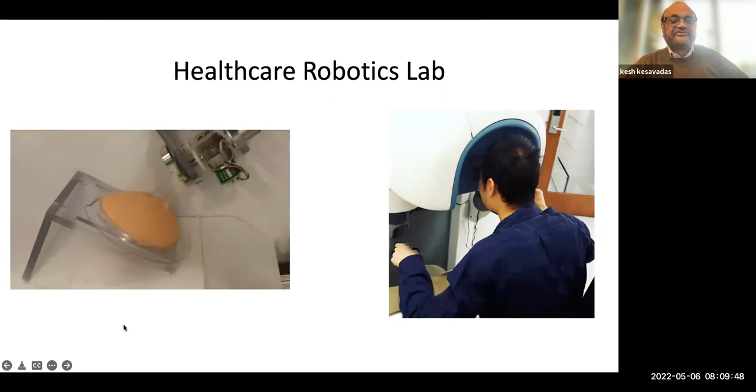So let me just start by giving a brief overview of my work. Here on the left-hand side is a robot we are working on to do breast biopsy. This robot is capable of automatically recognizing different types of tissue so that it will help for cancer.

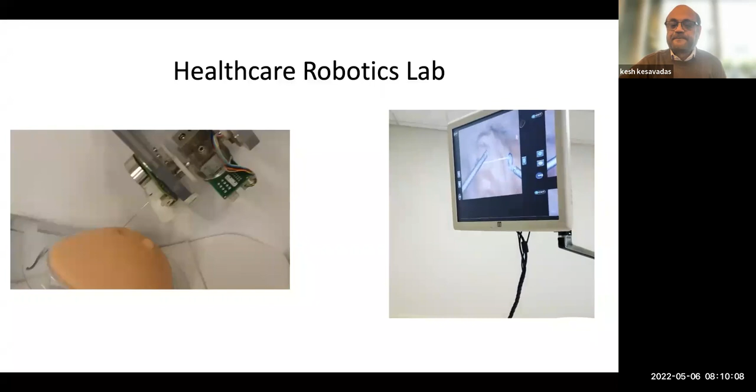The second is work that I've been involved in for more than 15 years, and that is training robotic surgeons for Da Vinci and other robotic systems. A system called ROSS was developed in my lab and commercialized, and is used in many hospitals and medical colleges around the world today.

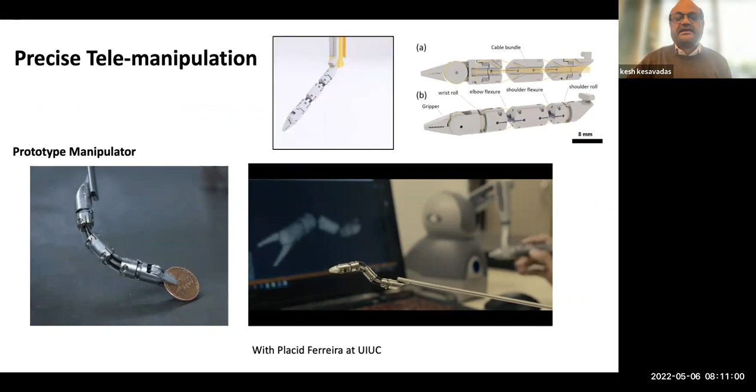So having said that, let me now also show some other work that we've been involved in. This is work I'm doing with Placid Ferreira at UIUC, creating a very small size robot for laparoscopic surgery. So today's topic is looking at human-machine interface in robotics.

I will break this into 4 parts. First, I will talk about the need for better human-robot interaction. Then I'll give you 2 examples of the work that we have developed. And then we go into a little bit about different techniques that we have used for identifying signals and some contributions that we have made into that space. And finally, a look at how robots can be used to understand human emotion.

So let's start about human-robot interaction and collaboration. Increasingly, robots are there everywhere, whether you go to a warehouse of a delivery center like Amazon, or you go into an operating room in a hospital. Robots are really everywhere. And with robots participating in the human environment, the question is, how can humans communicate better with the robots?

There are a number of reasons for this. One is, of course, safety. Traditionally in industrial settings, you have more control about the safety. You can put different kinds of tripping systems and so on and so forth. But once you have a robot actually working with you as part of your day-to-day environment, then safety becomes a bigger issue. The second is, how can you make robots understand your intention?

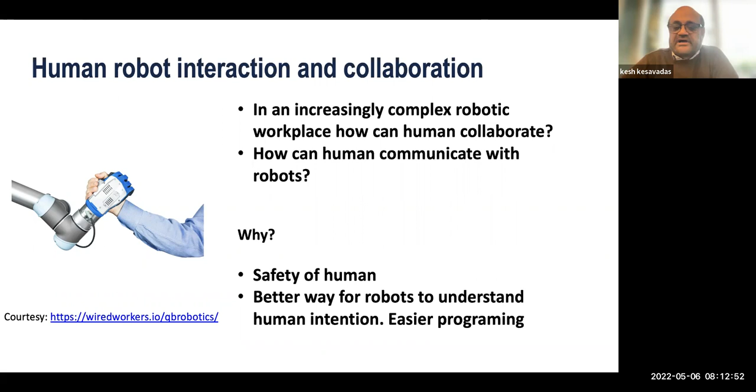I mean, if you have a human worker working with you, you always communicate verbally, non-verbally your intentions, and people understand what you're trying to do, right? When you have a robot doing that, how can you make that easier?

So my thought is that the next generation of industrial robots, it's not going to be systems that are completely pre-programmed. While it may also be true that in a very large manufacturing environment, you would still have robots with good feedback control systems and with good sensors and so on, doing really automated work.

But think of manufacturing domains where you want robots to be collaborating with humans in a somewhat unstructured environment. In these environments, we already see robotic systems helping people in the auto industry in lifting heavy objects and things like that. But in the same line, how can we make systems that are even more in tune with the human being and the thought process, which is what we are trying to get at.

So the question here is, can robots actually tap into your thinking process in your brain so that even without gestures or verbal interactions, can robots understand your thought process and react to it and complete some task you want to do? That was the original thought of our research.

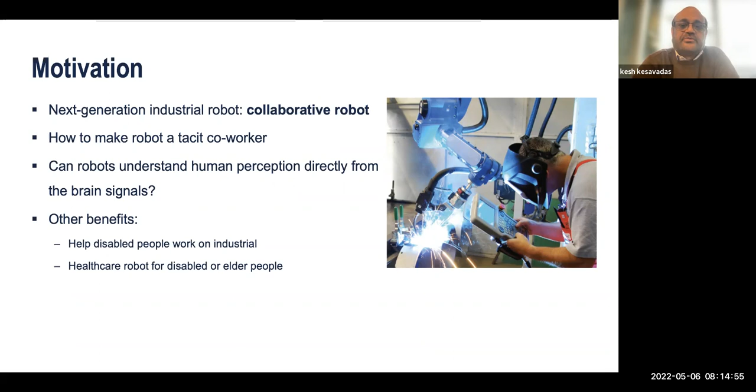There are many reasons why this might be helpful. One is that you could get industrial workers, also people from a wider background, including people with disabilities, to now participate in manufacturing. It could also help the elderly population through non-verbal cues and so on. So there are a lot of interesting things here in terms of learning from reading from the brain itself. It's been a big area of research, especially in the medical domain, for the last 20 to 25 years.

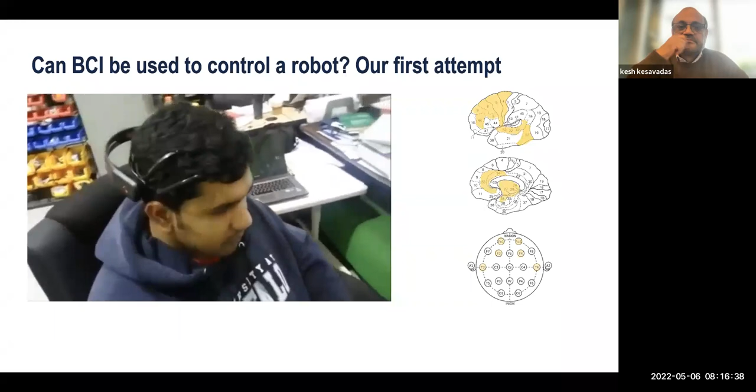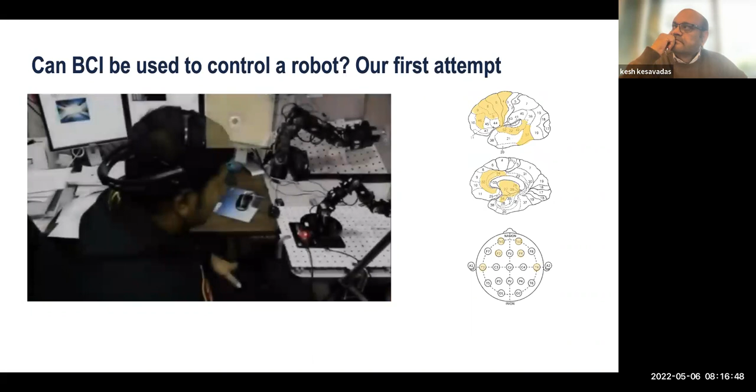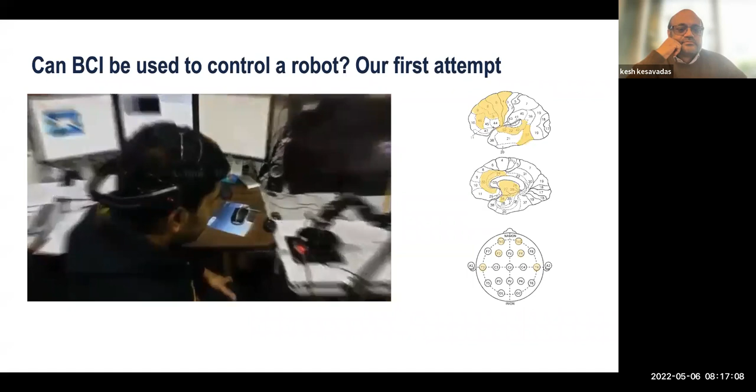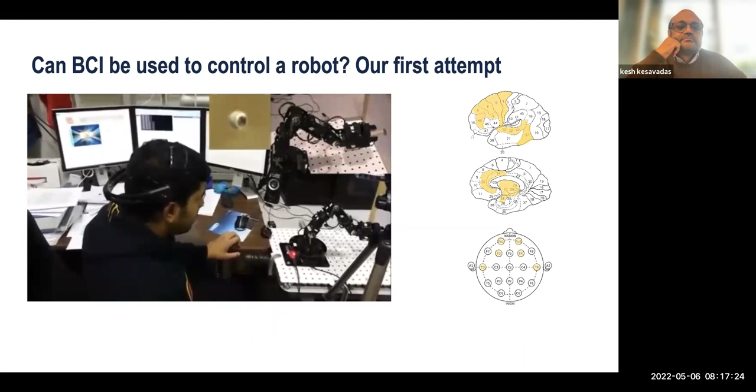Brain or mind-controlled robotic systems developed at the Virtual Reality Lab at University at Buffalo. A human operator is trained to control various actions of the robot by thought process. Complex trajectories are broken down into simple mental commands using a grammar system called ACTemes. The task being demonstrated here is to successfully insert a peg into a hole. First, the user is shown imagining a push action. Next, the user applies motion similar to rotation. Finally, by combining these two basic motions, the task is completed successfully. Most participants in our study were able to learn the grammar-based mental instructions in less than one hour.

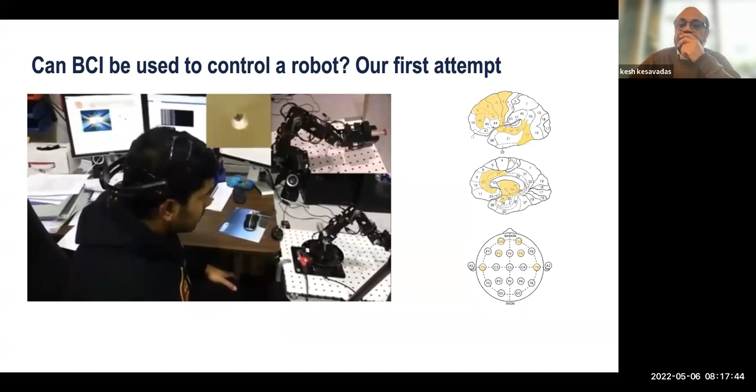One unique aspect of our study is that we were able to implement a mind-controlled robotic system using non-invasive EEG sensors. This work was actually our earliest work that I did when I was at University at Buffalo. This result was very encouraging, and it actually led us to getting a grant from the National Science Foundation to explore this idea and expand it further.

We looked at two industrial applications: one was welding, and the other was pick and place type work. Let's start with the welding robotic work that we envisioned, and we actually completed this project.

Here we used a concept called steady state visual evoked potential, or SSVEP. In a human brain, when you're given a visual stimuli, usually less than 10 hertz, it actually evokes a potential in the brain. For example, if you watch an LED light blinking at 6 hertz and keep staring at it, it sends a signal in the brain that can be captured using an external brain-computer interface. This was the idea we thought could be converted into an industrial application.

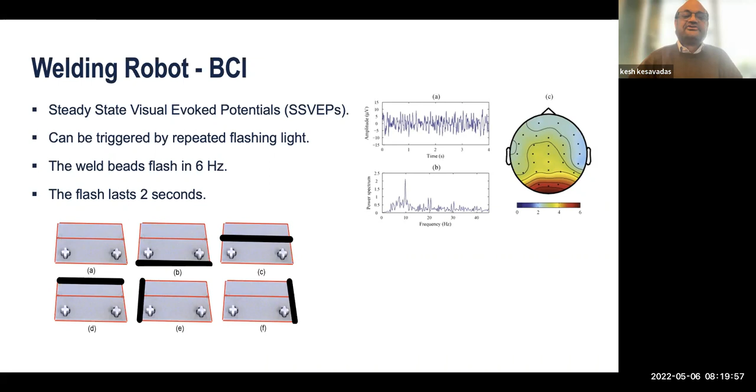If you look at the bottom left picture, you see two parts being welded. The horizontal line in the middle is where the welding is supposed to be done, but there are other edges as well, and any one of them could be a welding length. So what we're trying to do is put this welding setup in front of a visual system, like a camera, which automatically identifies all the edges that could be welded, and then it starts blinking at a frequency that can trigger an SSVEP. The human operator watches this, and the moment he or she identifies the welding length, it automatically sends a signal to the robot, and the robot comes, picks it up, and welds it.

Let's watch this experimental setup. On the right-hand side, we have a simulated robotic system that is used a lot for training purposes. We took a welding gun and connected it to a KUKA robot. Then, as it physically performs the action, the computer simulates the welding process, so we really don't need an actual welding system here. We took that and created this experimental setup, then tried to implement it to see if it actually works.

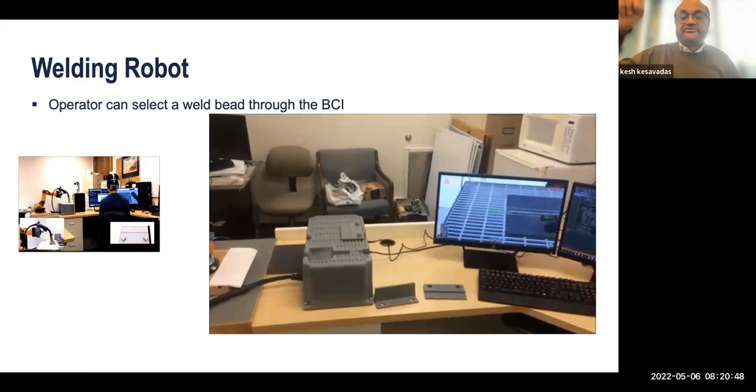You'll see in the left picture here, there's this welding system with the camera attached to it. The camera can go and look at the welding area and pick up all the edges that are potentially ready for welding. So let's look at this system working.

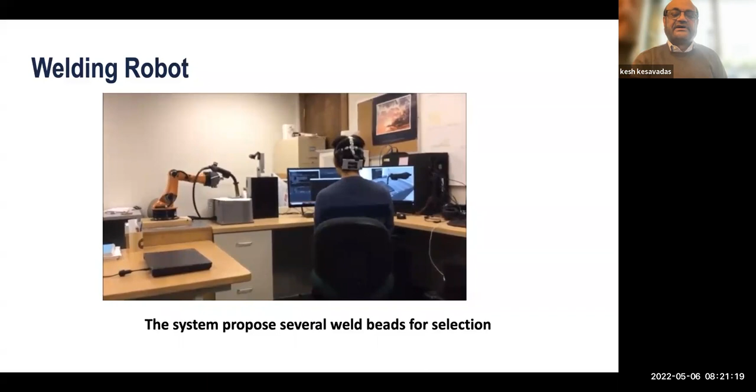Here the operator is wearing the HMD and is looking at the light blinking, and you will see that very shortly. The camera picks up the welding area and starts creating this SSVEP frequency signal onto that. As it blinks, the operator picks up the edge by staring at it for about 10 seconds.

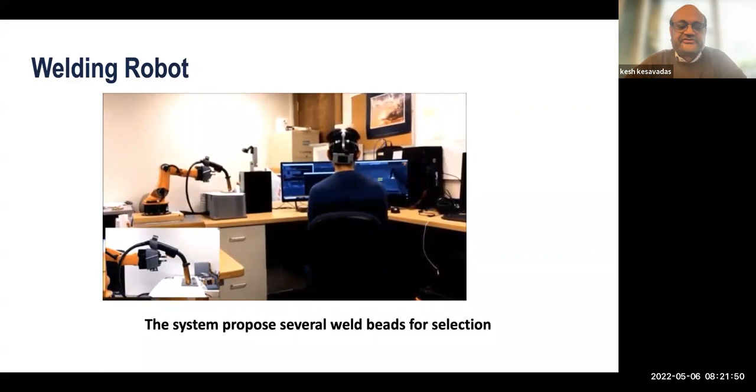You can see these edges now, it's automatically picking up different edges. So it picked up two. Now this is the one you want to weld, the middle one, right? So the operator actually looks at the middle one while not focusing on the other ones. This information is sent to the robot, and the robot now goes and starts actually moving and welding this operation. So this system we developed, and we did some human subject tests on that.

For signal capturing, we used a system called canonical correlation analysis, also known as CCA. It basically picks up all the data from about 18 different sensors, and using this data we can create a threshold. The threshold tells that if there is a peak above the threshold, then it sends a signal. If it's below, it is idle state, and if it's idle, it does not create any signal.

So initially we started with this approach called CCA. We tested that on 3 subjects. They were initially trained to use the SSVEP concept, and then they were provided with 5 different experiments where they were required to look and identify the welding edge, and then the robot had to do that.

We see that the 2 other subjects we are quite successful. They're able to complete 85 to 90% of the time correctly, with the robot able to weld the right edge simply by reading from the brain.

But in one of the subjects, the results were not good. There could be a number of reasons, everything from the leads not being attached properly on the head, to the subject not completely understanding the concept of looking at the welding and identifying the right edge.

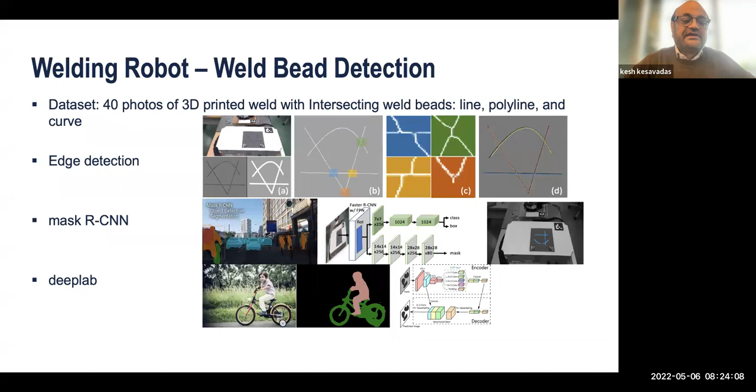In fact, we tried out many different ways, including standard edge detection techniques, using Mask R-CNN, DeepLab, and so forth. You see the figures at the bottom—these are automatically recognized data, and the one on the right gives us the best result, and that was based on the DeepLab approach.

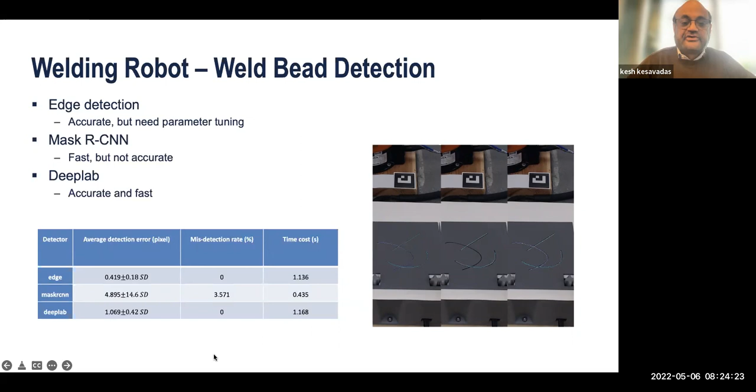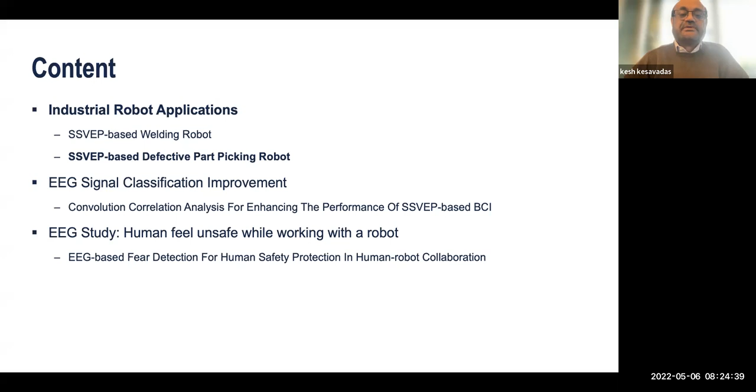So let me continue moving forward now with the focus of this paper, which was trying to see if we can now apply this to picking up a defective part from a robot. Let me explain the experiment to you first. The way this experiment works is...

The idea behind that is that there are a number of parts moving on a conveyor. There's a human operator constantly looking at these parts moving on the conveyor. Now, there are randomly a few parts which are defective. Once you find a defective part, that information the human recognizes is now communicated to the robot, and the robot goes and picks up that object alone.

To do this experiment, we set up a conveyor system, and we picked up these bolts as an example, and we created a few bolts which do not actually have a head in it—so those are defective parts. The human operator would drop parts on the conveyor. This is the second operator, and the part will start moving while the person wearing the head-mounted BCI keeps staring at the parts as they move on the conveyor.

So instead of directly staring at the conveyor, what we did was put two cameras, one in the front. As soon as the part appears, that is captured in the picture and put into one of the 4 images on the monitor. As you see, there are 4 images, so each image is a part, and each image is now flickering at a different frequency.

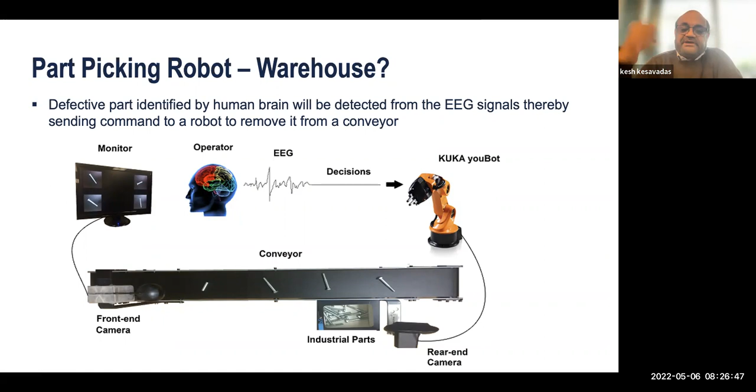So this is the experiment—there are 2 cameras on the robot. Let's watch this in action.

So the first part is in, and you see the picture of that. Then the second part came through, that's blinking. Now the third part was introduced, and it's blinking. Now the fourth part is introduced, and it's blinking. So they're all good parts, and the robot is not doing anything.

Then as the first part goes away, the first picture is swapped, so new pictures keep emerging while the user is constantly staring at it. But one part was defective.

An operator did recognize it, so the robot immediately went and identified and grasped it. I will just play this back a little bit. Let's look at that again.

You see that the next part which is coming in doesn't have a bolt head, and the user has already recognized that and picked it up. So information has been sent that part number 4 is defective, so it goes and picks it up, removes it, and throws it.

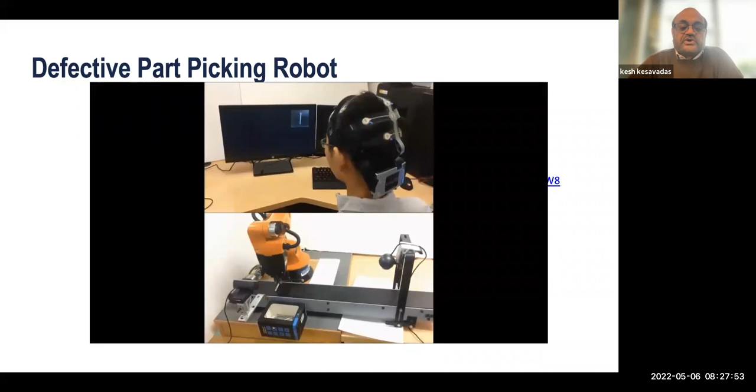So this is a really good working system, with an elaborate algorithm that starts with the new part entering, and a grasp planning is already created for the part. The moment the part comes in, the picture is snapped and sent to the monitor, and then put on a computer screen. That's a display here. Then from the display, the part is sent.

The operator looks at it and stares at it, and if it is defective, he stares at it for longer. If it is not, he does not stare at that. And if it is defective, then it goes to decision. Then the rear camera picks it up, detects the part, and throws it out.

We also developed an algorithm behind it, which we call the Two-finger random grasp algorithm, where we start with 2 points, and then we keep changing randomly those 2 points till we find an ideal grasp situation.

In the bottom, you see this algorithm being applied to various industrial parts, and you can see that if it's a 2D object that is graspable, we can always find a good grasping system, and it is quite fast—we can calculate this algorithm in a matter of a second. So by the time the part goes from camera 1 to camera 2, the grasp plan is already prepared.

Now let's jump a little bit onto some algorithms behind what we did. So from the BCI perspective, like I mentioned, the objects for getting the SSVEP need to be flashing at a frequency, generally below 10 hertz. Each of the 4 images on the screen is placed at 4 different frequencies: 6 hertz, 6.67, 7.5, and 8.57 hertz.

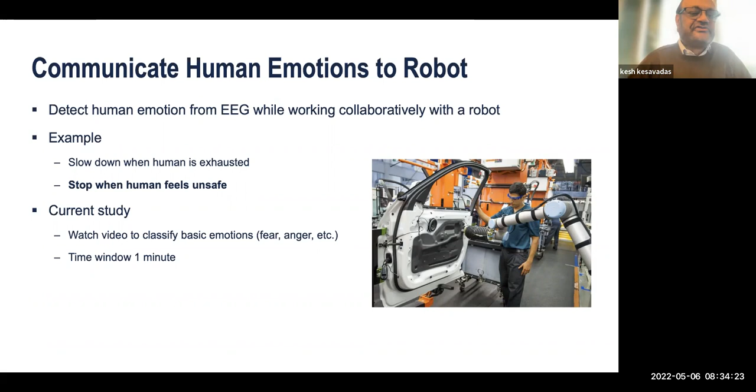That was our focus. So what we wanted to do was see if a robot can learn from BCI that the person operating it is stressed out. And if we can do that, then the robot can shut down the system or take an evasive action so as not to scare the person.

So we took 5 subjects and did this test. The robot keeps repeating a simple exercise—it just goes up and goes down. It's non-threatening, very simple, and as the user watches it, nothing happens. But then suddenly the robot does something completely unexpected. Just as we predicted, when that happens, the operator is suddenly startled, and then the robot recognizes that this operator is stressed out, and it shuts down. Let's watch this video.

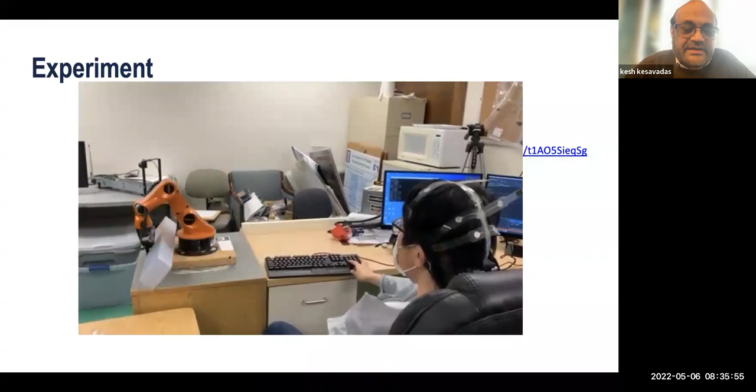As you can see, this robot is performing a very simple action—it's just going up and going down. Nothing is happening, and the operator is sitting there, not even knowing that something is going to happen, because we have not warned them. By the way, we had IRB approval for doing the study. Now suddenly it does something, and then the robot immediately shuts down. The signal extraction is done, and we developed an algorithm where we can look at sudden panic in the brain, and if it crosses a threshold, it sends information to the robot, and the robot immediately shuts down. So this is just a beginning.

I'll skip that for time. We used several classification techniques, but we got some really good results. Using the SVM technique, we got very high correlation, and we were able to successfully demonstrate that it works.

So finally, coming to a conclusion, I think BCI has applications in many unstructured robotic environments. It can also be very helpful for identifying people who are stressed, and making the robotic or automated system more adaptive to the user in the room, so the robot can increase or reduce its speed based on how well the work is going. Perhaps it also has a good application for surgery, where if a surgeon is very tired, the robot can perform at a different level.